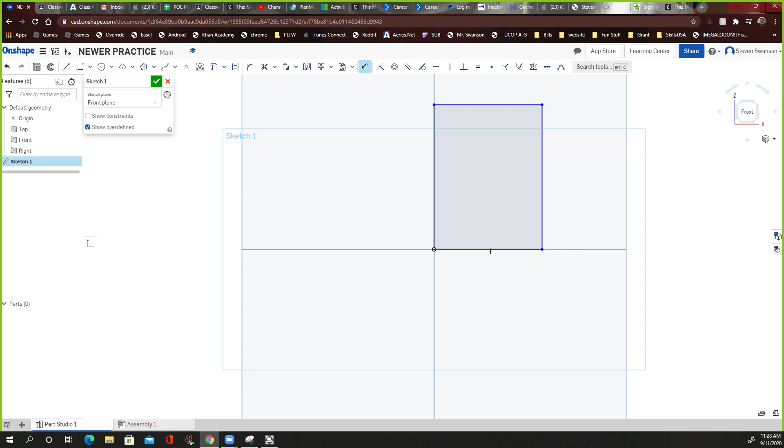So go to rectangle, let's start. It's always a good idea to start in this middle spot, then let's click it. Then I'm going to go to my dimensioning tool, and the whole thing should be 40, but I'm going to make it 20 because I'm going to be spinning it, so it's going to be half that thickness, going to spin onto this side and this side. So this is half the thickness of the real thing.

And then this thing is, I believe, 30 tall, so I'm going to put 30. Let's just double check I'm right. Yes, right here it says 30 from the top of this fat guy here to the bottom here, so 30.

And then I just got to draw that chamfer right here, this little angle. So let's see if I can do that. I'm going to take this line and kind of click that dot, click here, then click that line and click back. And there I go, I close that shape.

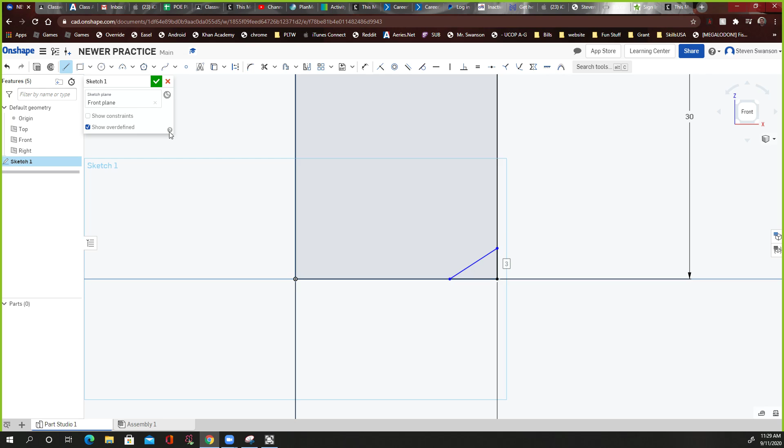Let's get the dimensioning tool out right here. Right here is the dimensioning tool, and I'm going to click that. See, I'm trying to click this bottom of the triangle, but it's clicking this whole line. You see that? Whenever you have that problem, start clicking points. So right now it's trying to click this entire line, but I just want to click this little area right here. So I'm going to click this dot, then this dot, and it's going to get the distance between that exactly. So I'm going to say 5.

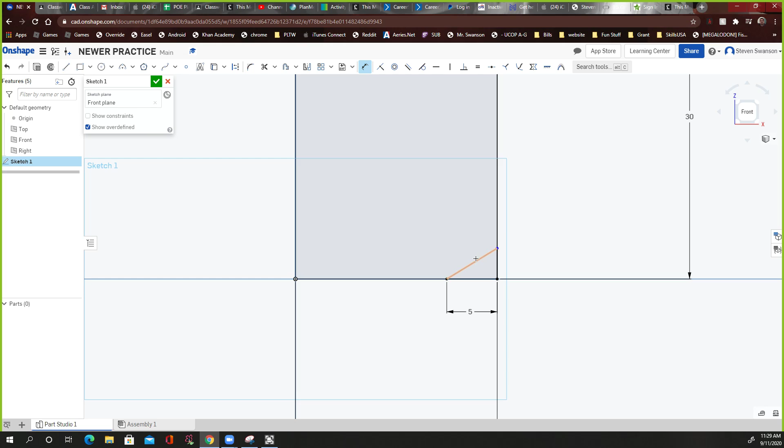There we go. It's still in the dimensioning tool, which is perfect, and I want this angle to be 30. So I'm going to click that line, then click that line, and it knows I'm talking about an angle. I'm going to say 30, then enter. There we go, that's exactly what they wanted.

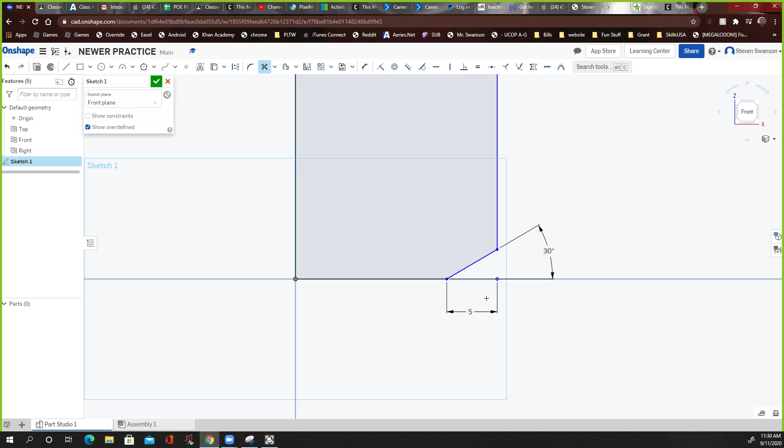But if I'm going to rotate this, I got to clean it up a little bit, it's always a good idea. So I'm going to use this trim tool, it's got little scissors, and click that. I'm going to click it - oh, that deleted some of it. Let's click it again, there we go. And let's click this one off right there, and let's click it off again. There we go, because I had 2 lines. There's a dot here, but that's for reference, but there's no line here anymore. So we're good.

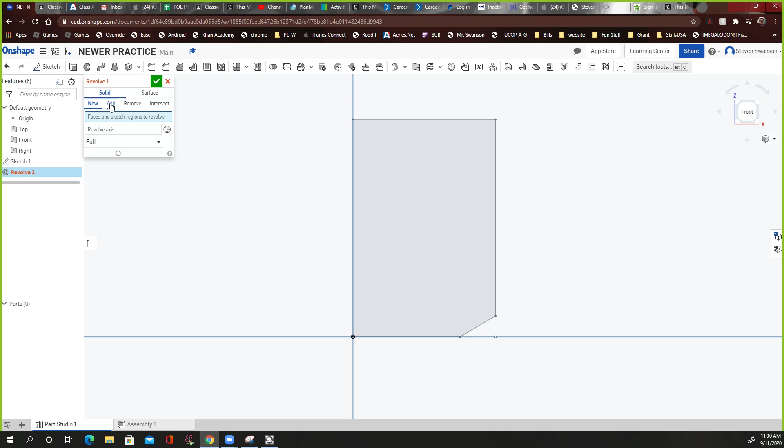And I think I'm ready to spin it, so I'm going to check mark this. Then I'm going to go to revolve right here. So now I'm doing a 3D feature, revolve, and I'm going to go to solid - make sure this is solid, sometimes it goes to surface. Go to solid, new, you can say add, because I'm adding material. Then face - I want this face.

And revolve axis - it won't let me click that. So I notice if I click this guy right here, select this - there we go, that's what I wanted. And then I'm going to push the check mark. Oh, and it just failed on me, of course. Why did it do that?

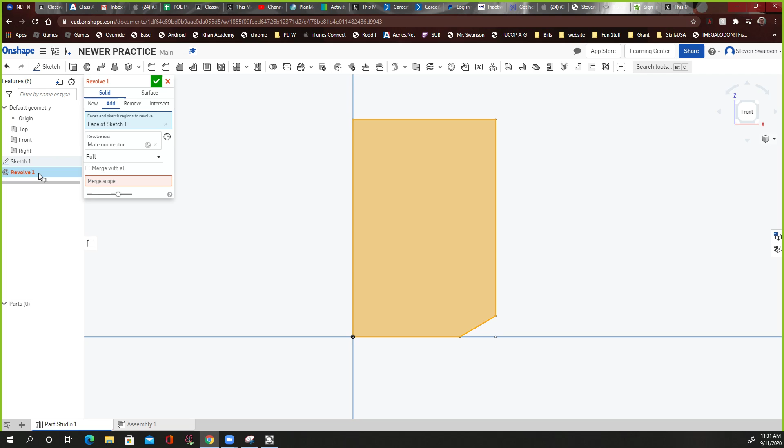Maybe because I did add, I'm going to put new. Let's see, I think I put add. I'm going to do new. There we go, new did it. So I don't know why add doesn't work.

But anyway, let's go to isometric view. There we go. And let's rotate it so you can see that bottom. There we go. Everything looks pretty now.

Now let's do this top part, this guy right here, and we're going to start with just this thing. It's 10 millimeters wide and 10 millimeters wide this way, and it's perfectly centered, 5 off the center. So hopefully I did draw this on the center.

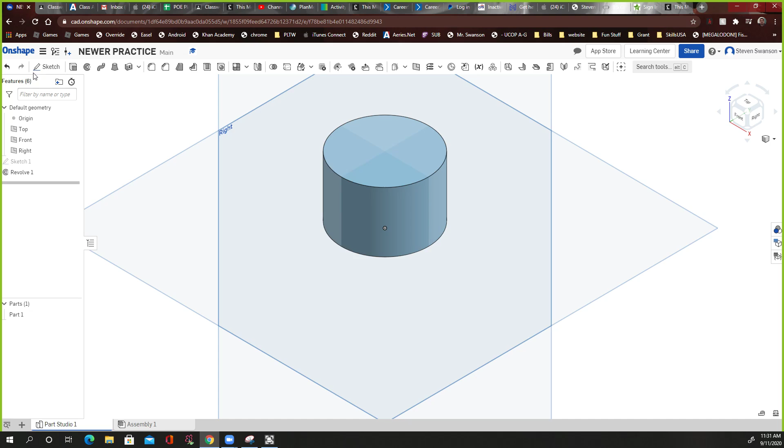I think I did, right here. So I think I did draw this on the center. Let's see if I did. So I'm going to sketch, and then I'm going to sketch right on this little face. I'm going to click it. But now I got to click top right here to rotate to that. And yes, it is right in the center, which is nice.

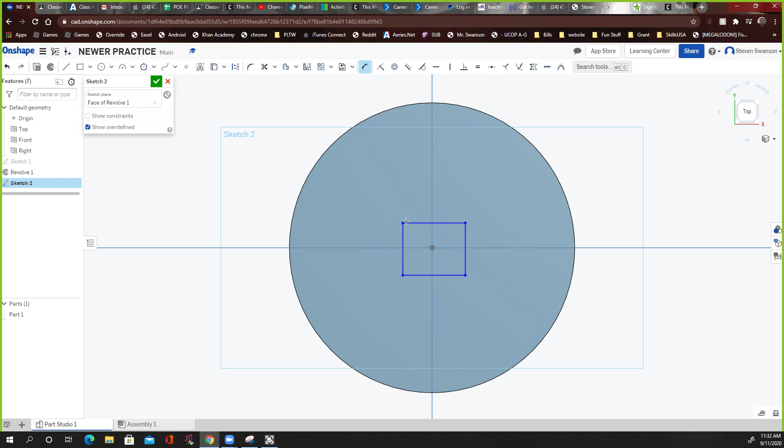So I'm going to draw a square and just kind of do that. But then I got to get my dimensioning tool right here, dimension it, and say this side should be 10. Oh, what? See how it does that right here? That's annoying, it thinks I'm trying to find an angle or something. So I'm going to click this dot and say 10. And then I'm going to go from this line and say, and I could have went from line to line before as well, 10.

Now I got to center that thing. So I'm going to say from this dot to this line should be 5, because it's half the square. And then from this dot to this line or this line, it doesn't matter which, should also be 5. And there we go.

It turned black, which means there's nothing else I can do. There's no other numbers I can add to it. It's what's called fully constrained. It knows everything about it that's possible, and anything else you try to add is going to say you're over constraining it. You're trying to tell me to do more things, but it's fully locked up. There's nothing else I can do to this thing.

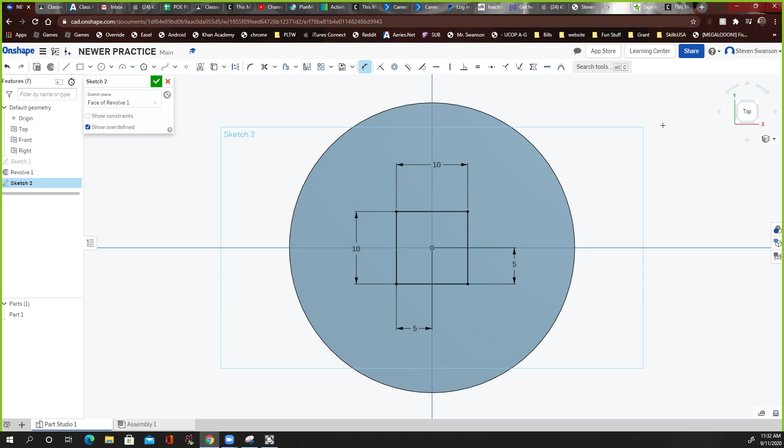So then I'm going to say finish right here, the little green button, and then I'm going to rotate it just a little bit so you can... well, hey, look at that! That went straight to isometric view, and I'm going to extrude this guy up, and I think it goes up 20, if—or I don't remember how much.

Maybe it's 15, let's see. Right here it says 15 right there. See, so it's 15 high. So let's do 15 right here, and then let's check mark that.

There we go. Now the last thing we have to do is this radius of 5 right here, and that can be done with a fillet tool. So right here, I think that's loft. Here we go, here's a fillet tool. So fillet will round off and remove a chunk, but it also will add material to fillet as well.

So I'm going to click it, and then it's at 5 millimeters right there. You guys see that? So it's at 5 millimeters, which I think is good because R is 5, perfect. Remember, fillets are in radiuses.

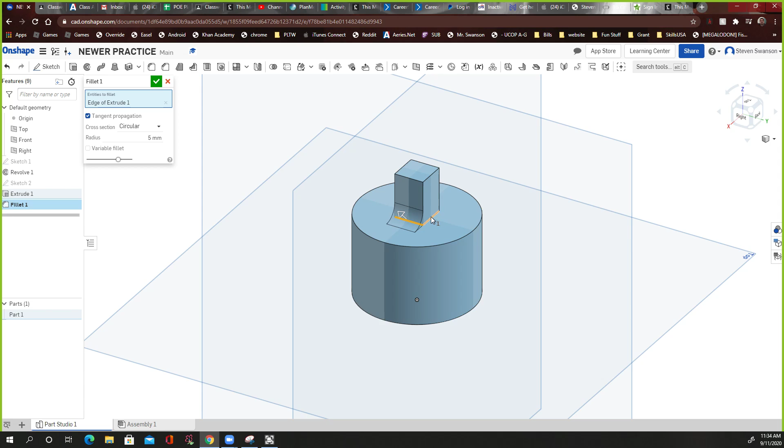And I'm going to just, don't click that side. Do not click this thing. Click that line right there. And look at that. I'm going to click this line, and let's rotate this thing around. Let's click that line, and let's see if I can rotate this thing around.

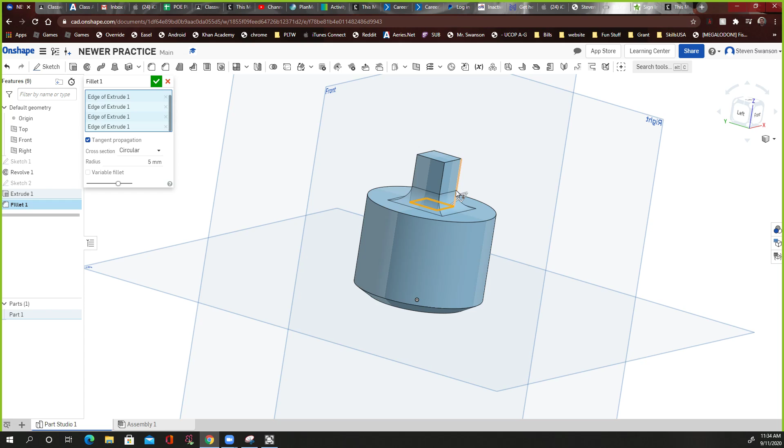Not the whole, just you. Let me make sure I'm doing this right though. There we go, there we go. And I'm going to push check mark here when I'm all done. And I think we're done.

Let's go to the isometric view, which is go here, isometric. There we go. And we're all done. I think this is fully complete and all finished.

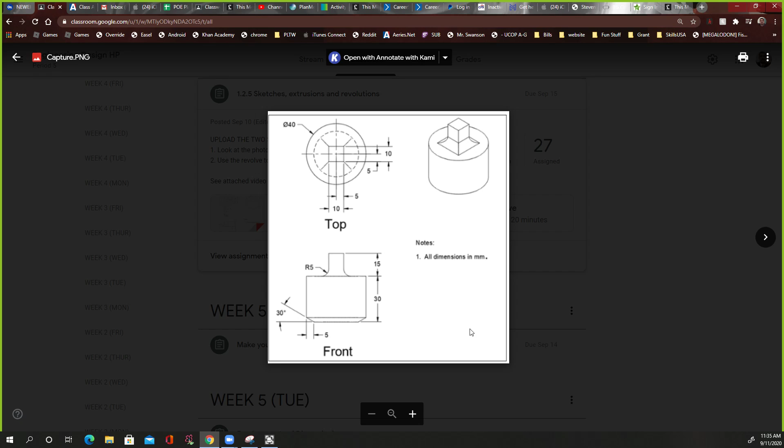There is actually no other numbers here. We did the radius here, we did this height. From the top view, we did put this correct, this correct. They're both 10 by 10, and it's 5 off and 5 off from the center of that line. This guy is 40 wide. We did 20, and we spun it around to make it 40. And we did take care of this little taper at the end when we did our rotation, and 15 and 30, and yep, that's pretty much everything they've given us. There is nothing else to add.

So if you were to add things like, I want to take this fillet and round it like 0.5 just to make it look pretty—look at that, you see how it rounded that? That's pretty, but you're doing stuff that they're not asking for at that point. So it does not say to do that, so you don't need to do that.